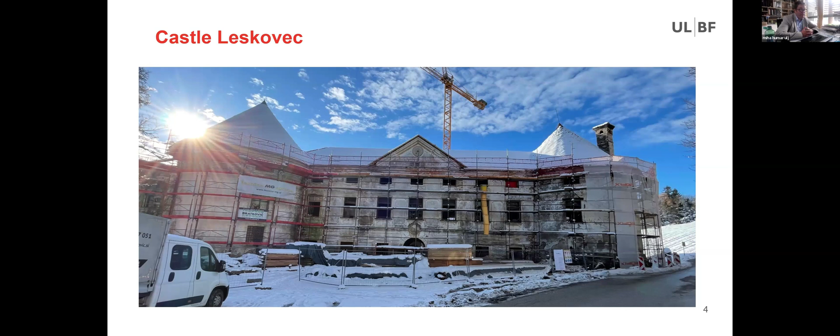This castle's renovation has been going on for a few years, and it's very likely the renovation will continue for additional years. The castle is in a rather bad shape right now, but the local community has a lot of plans to make it a location for cultural events, weddings, wine tasting facilities, maybe a boutique small hotel or things like that. But in order to do that, the castle needs to be maintained, because right now it's not suitable, not even for a prison.

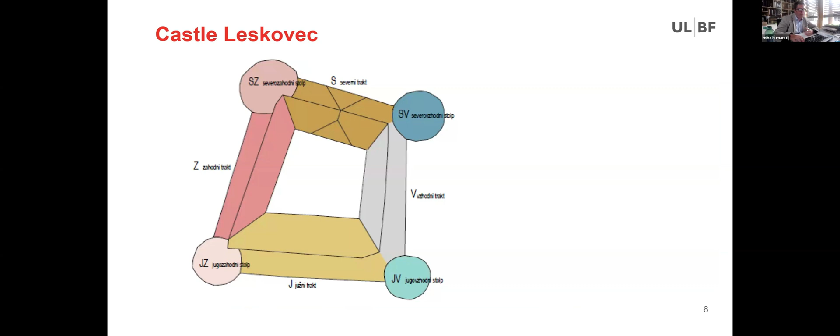That's how the castle looks from the top. It has 4 towers and a central yard, and this castle was first mentioned in the 15th century. The Slovenian polyhistor Valvasor made a drawing of this castle in the 17th century - that's how it looked at that time. We have to consider the images might not be very accurate, but the original idea is very similar to what we see today.

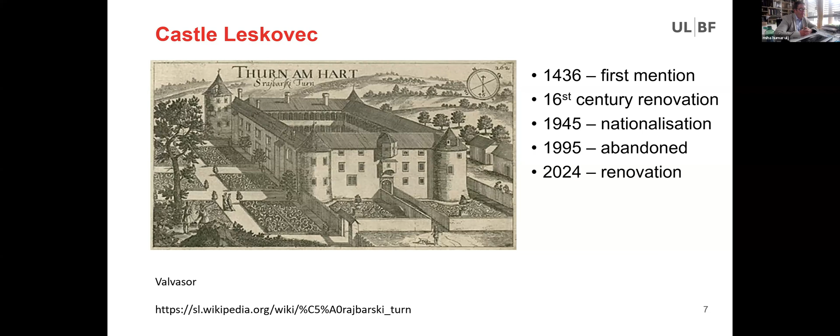In the 16th century it was renovated. In 1945 it was nationalized, and then it was abandoned after 1995 for almost 30 years. In those years, as long as this castle was abandoned, it suffered a lot.

The majority of the wood in this castle is in the roofing - that's how the roofing looks. The question that we got is: is this roofing construction in good state, or do we need to replace it? And if the material is degraded, how is it possible to reinforce it? Is it possible to use wood preservatives to stop decay? And how to proceed - they want to have kind of recipes.

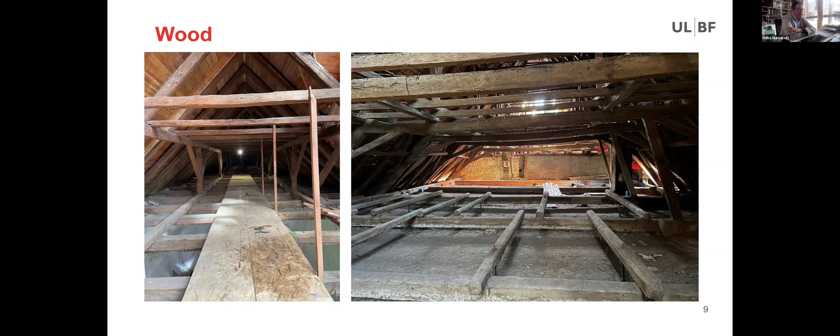And that's why we have been in this castle 7-8 times to assess every beam and recommend what to do in the future. That's how the construction looks - part of the material was already replaced, predominantly of the roofing material. The rest of it is just there, let's say that way.

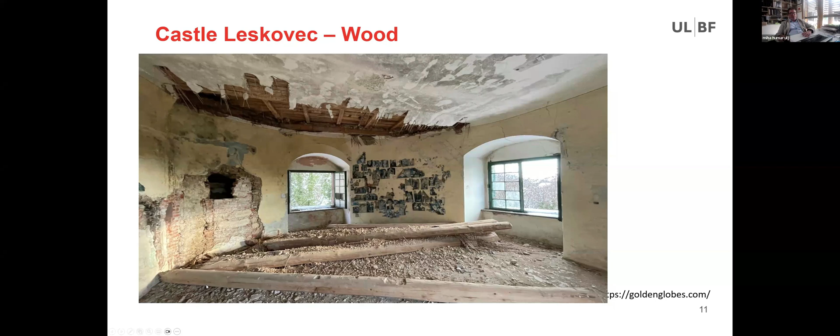Please continue. On part of the castle, we can see there was already damage. You can see the beams that were deteriorated from the roofing. So part of the castle was already rather dangerous to walk on at the moment, like this one. We can really see that part was already demolished.

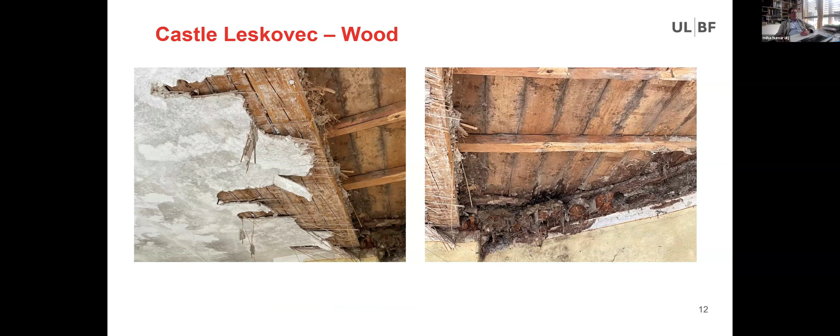We have to consider that the castle was empty for 30 years. There was zero maintenance during those 30 years, and there was a lot of leakage. There were a lot of problems noticed within this castle.

There were some examples of bad maintenance. For some of the beams, we were not sure why certain things happened. For example, the owners, at some point, decided to cut this beam at this point. I'll show you - you can see that they decided to cut the beam here.

They simply cut it with a saw, and the way the beam was loaded, it was under bending load pressure. There was a huge tension released, so the force goes in both directions, and a huge crack developed. This influenced the static performance of the castle.

of the whole floor. So there were a lot of examples like that where people - we don't know if they were looking for fuel wood, or wanted more space and wanted to remove part of the wood. We have no idea why this happened.

During our study, we had to recommend what to do with this kind of material. We recommended that they apply screws and fix those two beams together, apply adhesives in those cracks, and integrate this member, filling the cracks with adhesives - this will enable the beam to remain in service in the future.

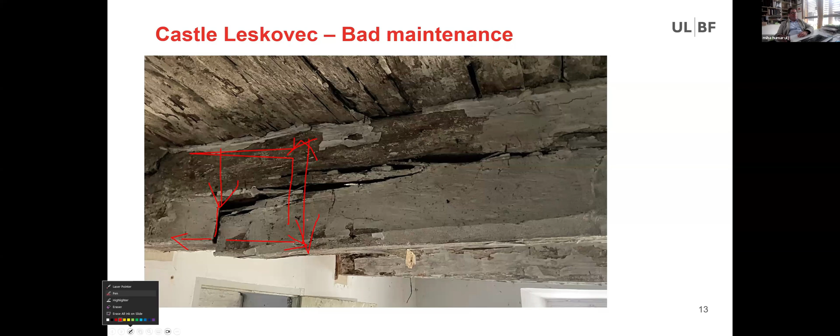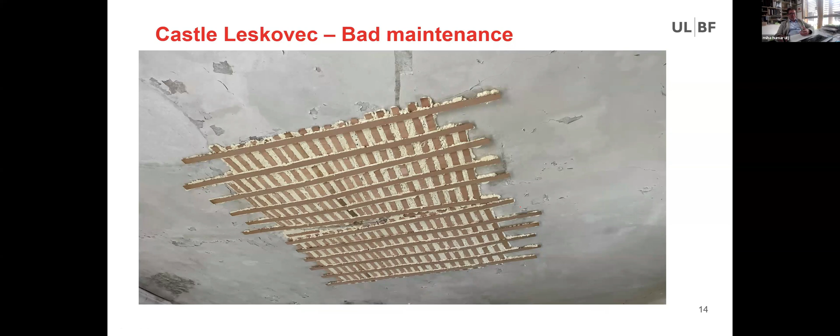For example, in another case, there was this kind of maintenance - they used polyurethane foam to fix the roofing in one of the buildings. There was probably some leaking, I don't know what happened on top, and they used this technology to repair it. There were a lot of repairs like this, and this kind of repair didn't contribute to the good performance of the castle.

So we came to this building to assess the condition. The decay of wood is primarily associated, in our climate conditions, with wood decay fungi. Wood decay fungi are the prime cause of the decay, and that was true in this castle as well.

In addition to that, insects are the second most important factor. But insects are less important in Slovenia than in some more tropical or warm countries.

When talking about wood decay fungi, we are aware there are four types that appear in buildings: brown rot, white rot, soft rot, and sapstain. Within this castle, we primarily noticed brown rot fungi - I'll show some examples. Brown rot fungi predominantly degrade cellulose, and what remains is the oxidized lignin.

In addition to that, there were some sapstain fungi. Sapstain fungi don't actually degrade the material, but live off the residues. We can find them also on the plaster and on the walls, and they're usually associated with condensating water. If sapstain fungi are present, we know there are leakage problems.

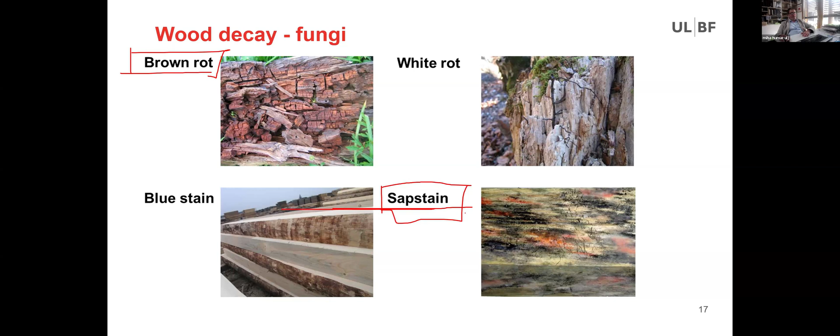And one moment, if I may.

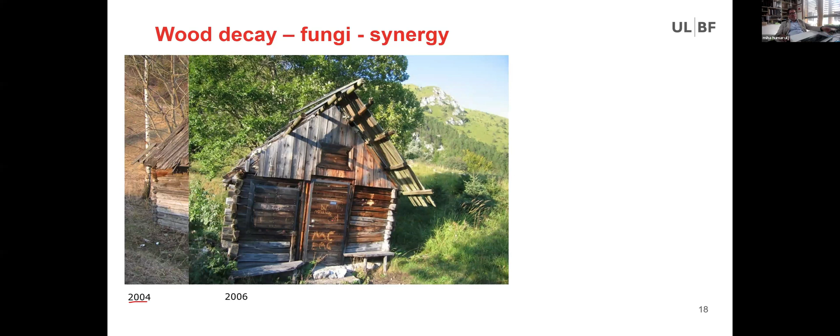Those photos, the first one was taken in 2004. At this time, this building was already almost abandoned, and there were some damages. But later on, we can see that year to year there was more damage until everything collapsed. In 10 years, from 2004 to 2015, the building completely collapsed.

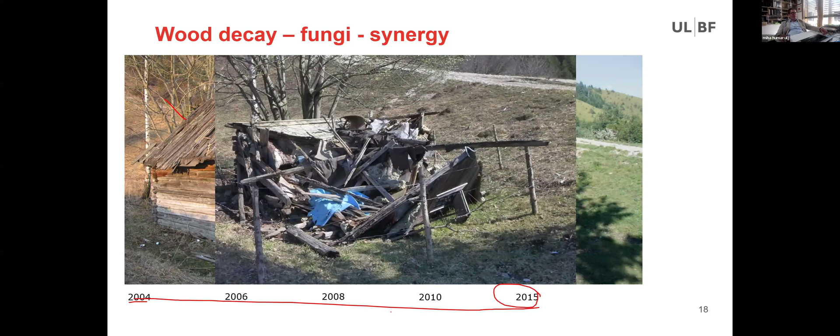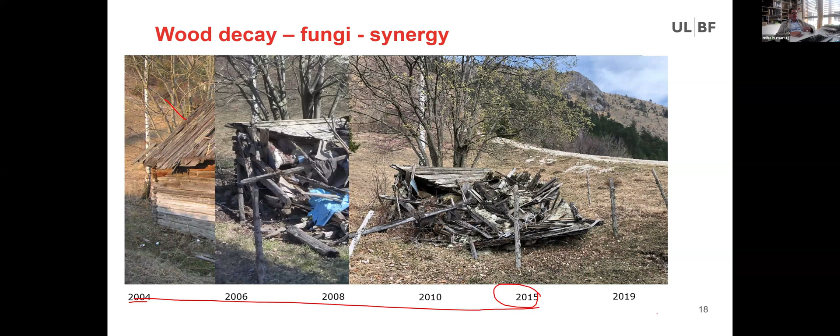If we're not maintaining the building, everything can move really, really fast. We have this building in this kind of condition for years, and we're always joking that those buildings are waiting for the 1st of May, because on the 1st of May we're always burning open bonfires, and we should burn this wood in the bonfire.

Whenever we are talking about wood decay fungi, we are aware that we cannot stop the decay - we can only slow it down. And if we want to slow it down, we have to keep wood outside the optimal degradation conditions. This means that the easiest way to do it is to control the wood moisture content, so wood has to be drier than this.

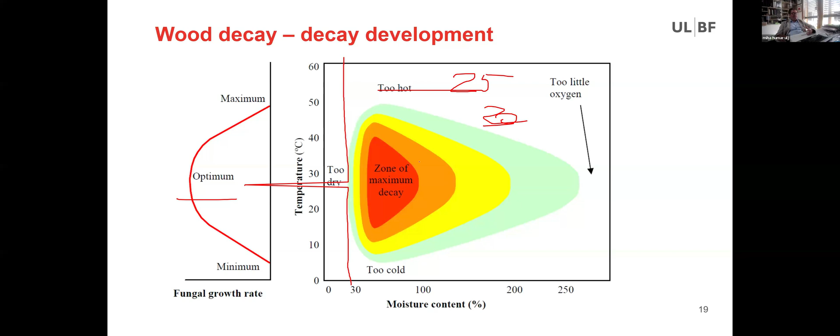This means wood has to be drier than 25%. Usually the maximum limit we state is 25, but we recommend a moisture content of 20%. 20% is the moisture content we ask for, because we cannot fully control the temperature - that's an outside condition - but we can control the moisture content. That's why we always ask all house owners to ensure with maintenance that moisture content never exceeds 20%. But things are a bit more complicated, because for some wood species, sometimes the moisture content limits are even lower.

The lowest moisture content reported is 14.6% - that's the minimal moisture content of wood where decay happens. This means it's very low. Usually the moisture content of wood in a building, let's say in a residential building, is around 13-14%, so this one is almost at that limit.

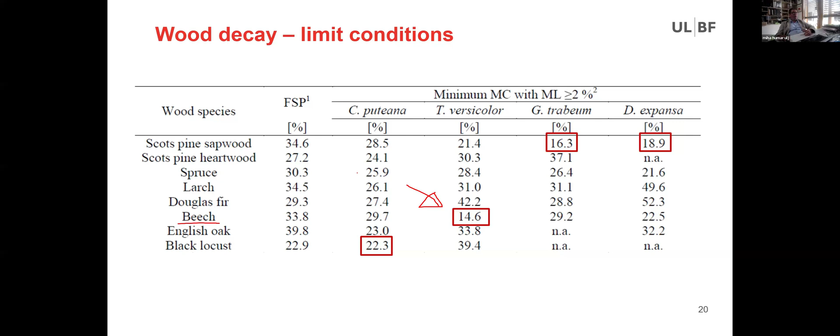But we have to be aware that this is true for beech, and there is always a water source nearby - like soil or some wet pockets. But in general, we talk about 20%.

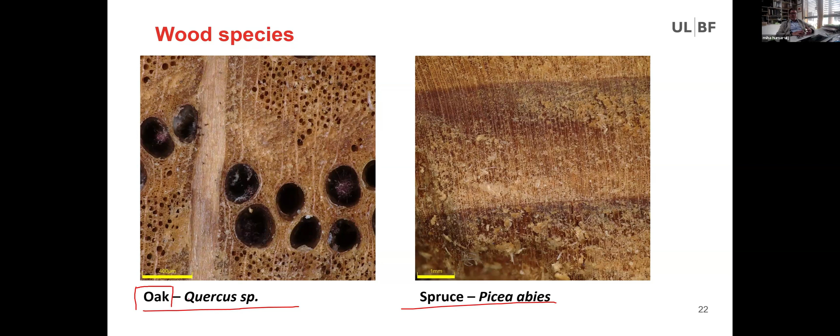When we're talking about oak, especially in Slovenia, I have to mention that up to the 1850s there was a law that oak was allowed to be used only for noble families, church, and military purposes. So oak in this area, at the time the castle was built, was very expensive material. If they used oak for this kind of construction, this indicates that the owners of these castles at that time were rather important.

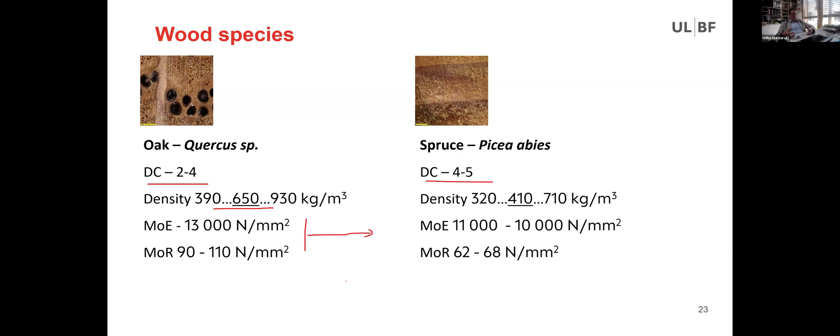The basic properties of the material are indicated here. Oak is very durable material, spruce is less durable. The density of oak is higher, and the mechanical properties of oak are better compared to spruce. That's why it's obvious that because there was a lot of oak wood used in this castle, even if there was bad maintenance, the castle can still resist well because they used high quality material in the past.

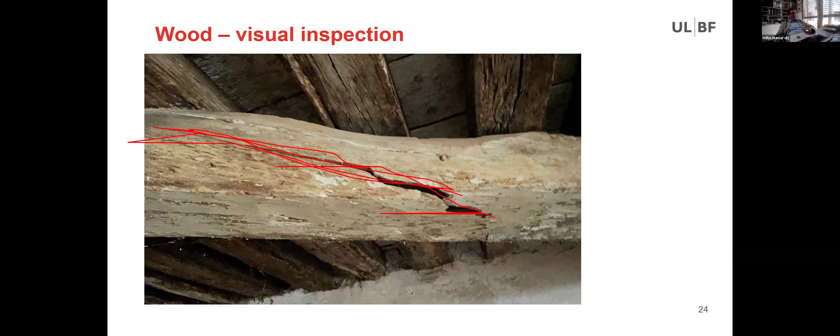But it was not only one mistake. We noticed quite many of them on several occasions - a second, same type of crack formed. This crack is not a result of a huge load or a lot of snow or anything like that, but it indicates that they did not pay sufficient attention to selecting high quality material in terms of growth condition. We noticed, I think, 8 or 10 beams like that on the castle. That's far above average - it would not be acceptable in today's construction to have this kind of material.

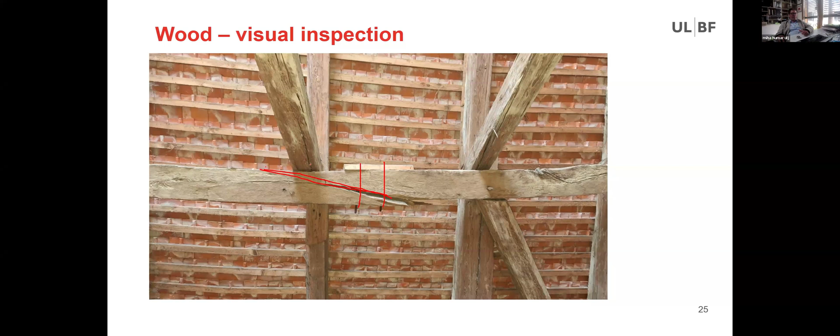You can see that in the past they tried to already solve this problem. You can see those screws oriented here, where they tried to fix this error in the past already - that's an old repair. We don't know exactly when they tried to do it, but it's obvious that they tried to solve this problem.

In addition to that, we noticed some insect damages. But before I move to the insects, I would like to show you those white stains everywhere on this beam. Sometimes people think those white stains indicate the presence of wood decay fungi. But if you touch this material with your finger and try to squeeze it between your fingers, you will notice that this is very, very fine salt.

These white powders are white crystals that are deposits, a clear indication that there was water leakage present here in the past. The water evaporates, but the minerals that were dissolved in this water remained on the surface, and those minerals usually originate from the roofing material. So if you see this kind of damage and you don't see the hyphae, that's an indication there was a huge water leakage in the past.

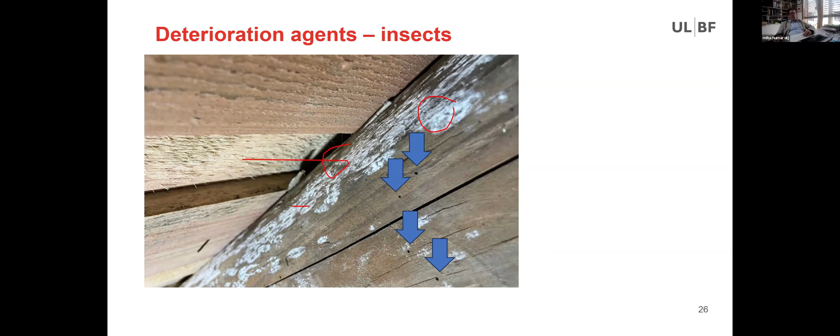The other things I want to point out are those borer holes. Those borer holes belong to the deathwatch beetle. We notice the deathwatch beetle in spruce and oak wood. This deathwatch beetle is characteristic of old wood, and that's how it looks like.

It's called a deathwatch beetle because the male representatives of these insects hit their head on the wood, and we can hear that. In the past, because people were superstitious, they heard the deathwatch ticking and thought death was coming, and there was a lot of superstition about that. But it was not a death call, it was actually a love call, a mating call. The male was trying to invite the females to join them, something completely opposite to death.

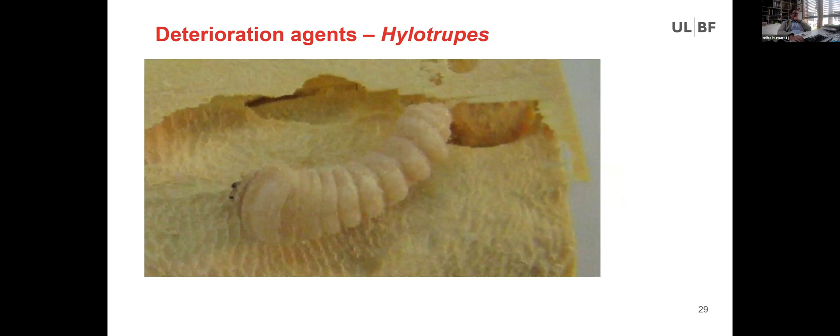In addition to that, we also see damage from longhorn beetles. That's very common for spruce. For a house longhorn beetle, it's characteristic that a female can produce a lot of eggs, up to let's say 300 eggs. The damage caused by those insects can be seen like that.

Usually the surface of the beam is not deteriorated, but the sapwood below this surface could be completely degraded. It's like just sawdust, but luckily those insects are attacking only the outer layer of the beam, so they're not reducing the mechanical properties of the material too much.

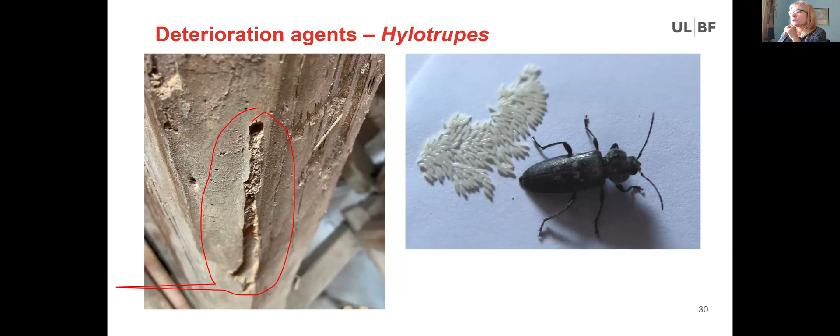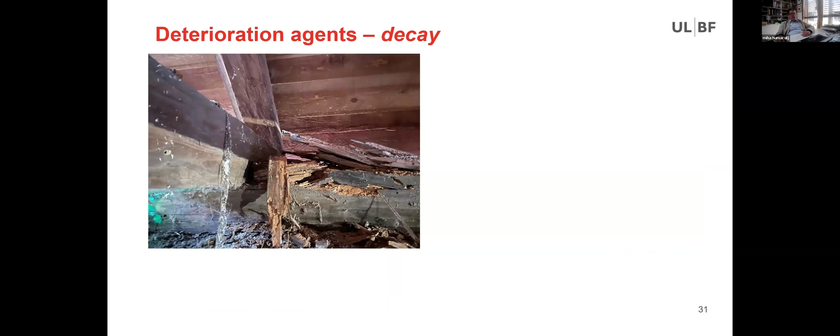In addition to that, we see a lot of decay. The decay was brown rot decay. Decay caused by fungi was the prevalent factor of all kinds of damage within this building. In this image, I'll show you the most basic characteristic of the fungi that we see. This is the Coniophora.

In English it's called the mining fungus. The mining fungus indicates that this fungi was found in mines, where the material was very humid, where there was a lot of condensating water. So this indicates that there was a lot of water present in this castle as well.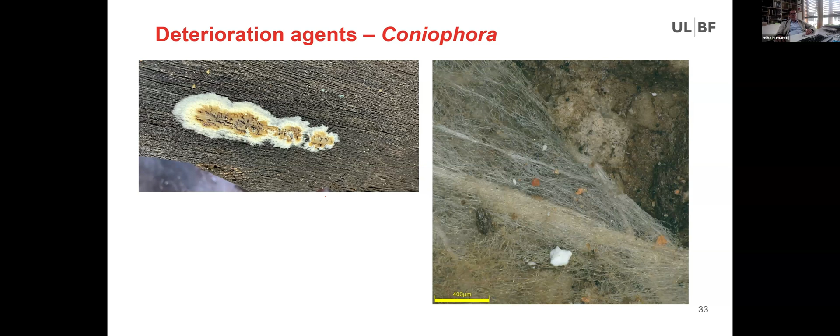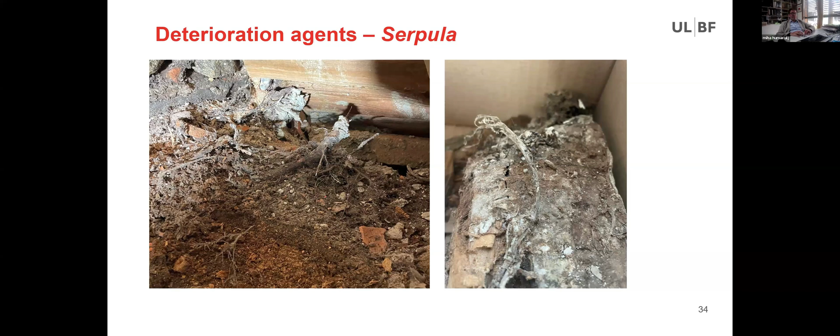That's what I know. The second one, the most annoying fungi in this castle was the fungus called Serpula lacrimans. This fungus is able to grow also through concrete or brick walls, so it can even cause damage on brick material, not only on wood. The problem with this fungi is that it's able to produce water during the decay of wood, so once it infests the material, it can be self-perpetuated, degrading wood on its own. We noticed a lot of damage caused by this fungus.

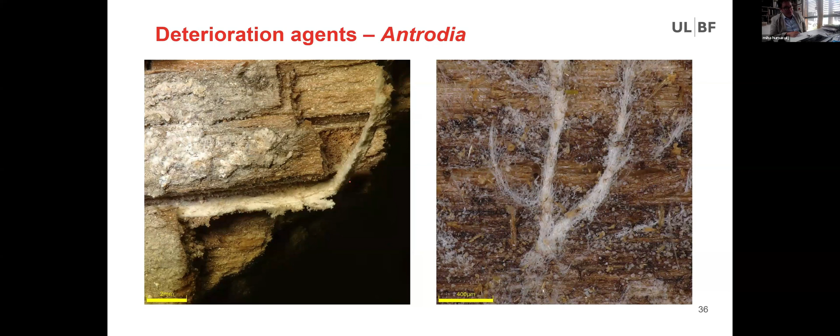And the third fungus was Antrodia fungus. That was another one that was also present. It was a clear indication that because the castle was so big and moisture conditions were so diverse, different fungi were finding their optimal ecological niche to grow within this castle.

In addition to that, we noticed on all the walls in this building, a lot of walls were covered with mold fungi, with staining fungi that do not degrade the material, but degrade only the surface of the material.

And the question is why and how those fungi affect the integrity of wood. So I have to mention.

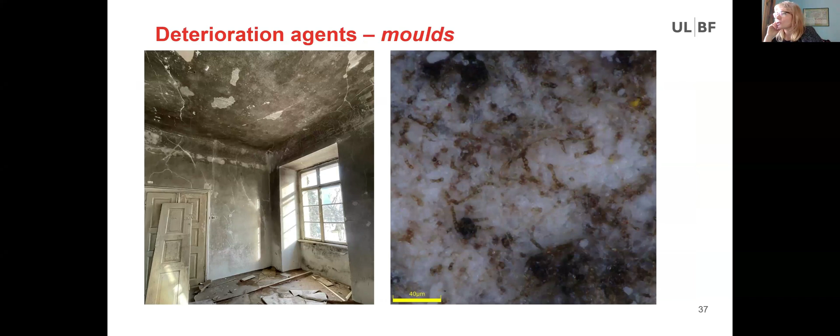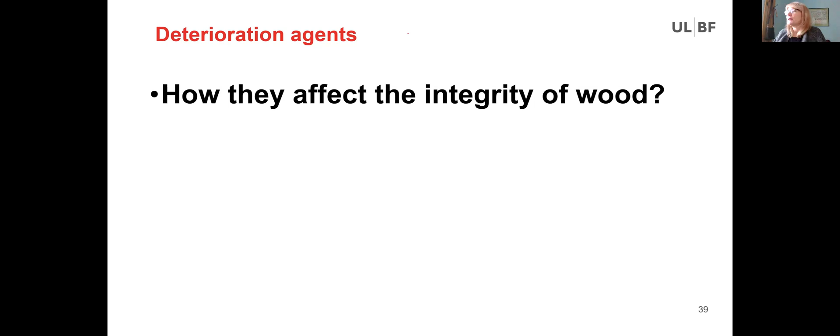So the fourth thing that we do then is to measure the moisture content of wood. We are using two different moisture content measurements. One is based on electrical resistance, and the other one is based on electrical capacity. This one is faster, this one is more accurate.

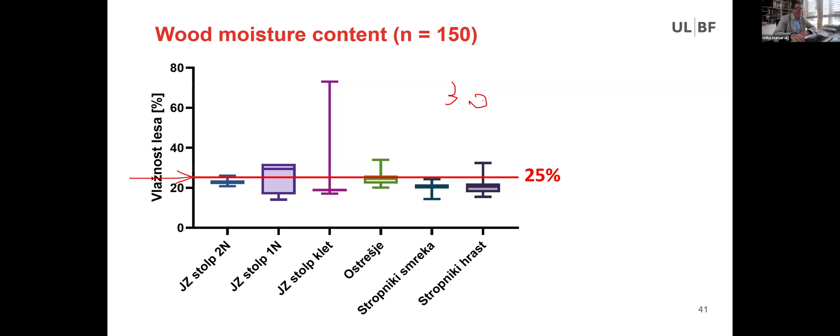Thank you. Some of the words in Ukrainian, like zamak, are very close to Serbian as well. I mean, it's... Yes, you are right. Because I know what you're talking about, for me it's very interesting to hear. It's dangerous if you understand what I'm talking about.

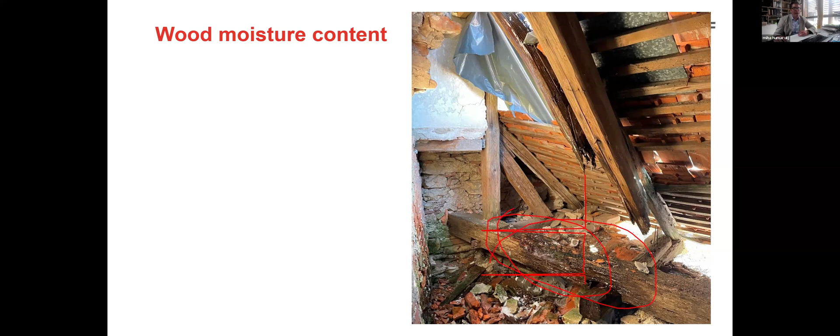Okay, thank you. I mean, the reasons for high moisture content can be seen here. For example, you can see water dripping here, the roof was leaking. They repaired the building, but there were still a lot of mistakes on the castle. You can see that this part is completely wet. That's not okay, and it's obvious it's not okay.

The second type of measurement that we run on this material is we try to assess the density of the wood. It's very easy to assess the density of wood in the laboratory, but to assess the density of the wood of the beam, it's very challenging.

But there is a method called the screw withdrawal device. So we are running the screw into the wood, that's a screw over here, and then we try to pull it out. And the force needed to pull out the screw correlates well with the density.

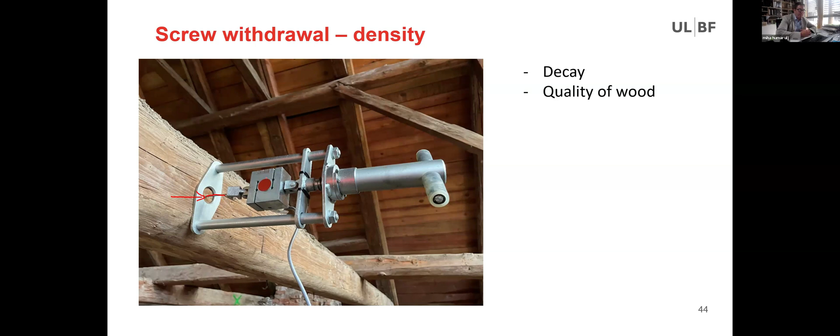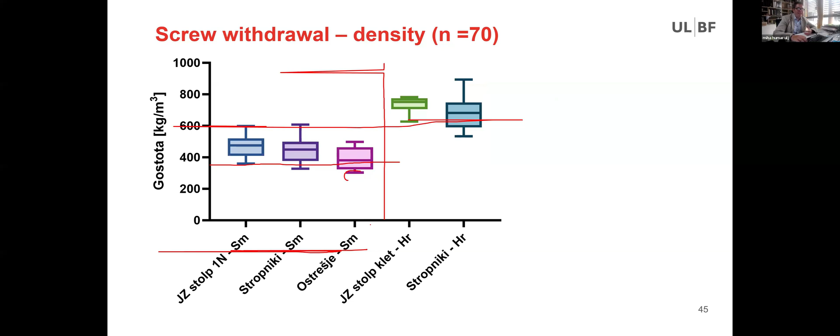And those are the results of the density, the results of those samples. That's spruce, and that's oak. But we can see that the material below this curve is degraded material. The oak, however, was rather well preserved, and the majority of the oak was above the average curve. So the density indicated the material was rather well preserved.

In addition to that, we're also running the time of flight measurement. So we are measuring the time that it's needed for the sound to pass between those two electrodes. And if we're measuring this time, and if we know the density, we can calculate the modulus of elasticity based on these data.

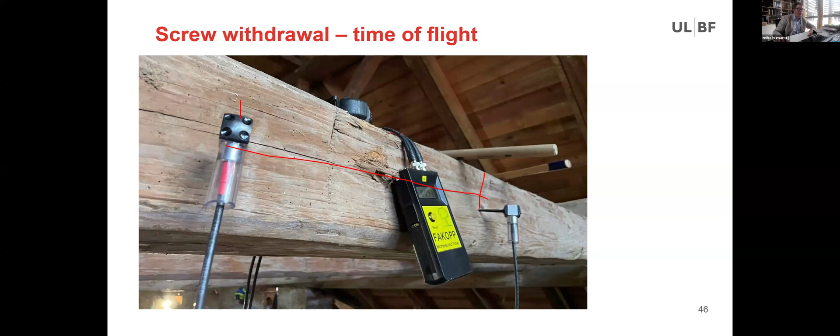We have to be aware that this information is about the modulus of elasticity of the surface, not of the central part. But still, we at least have the impression of what the basic modulus of elasticity is. This is the lower 80% of the modulus of elasticity for spruce, that's the red curve. So we can see that quite many beams were very, very degraded because of decay or fungal infestation.

And they need to be reinforced.

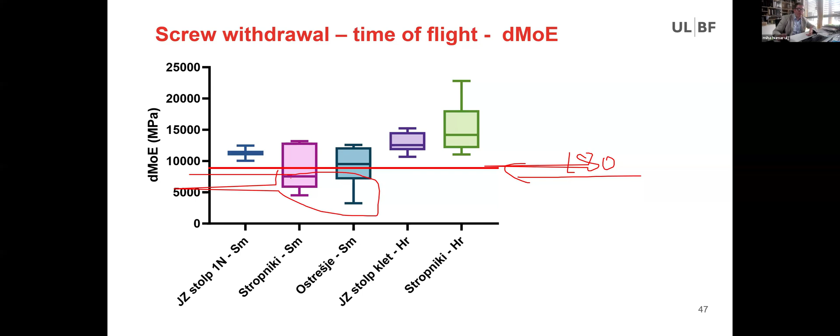And the second most important device that we are using is for resistance measurements.

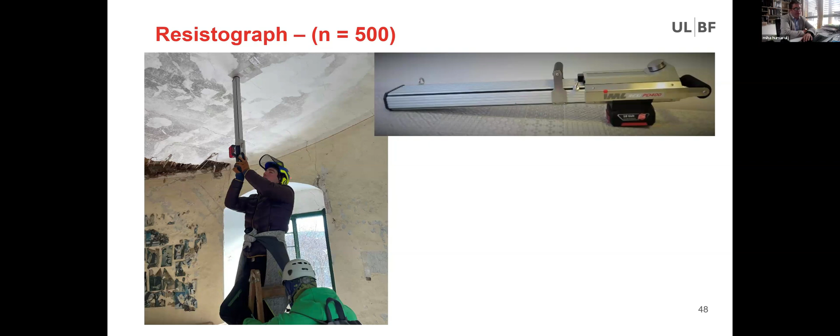So using this device, we are measuring the resistance, the momentum of the needle penetrating the wood.

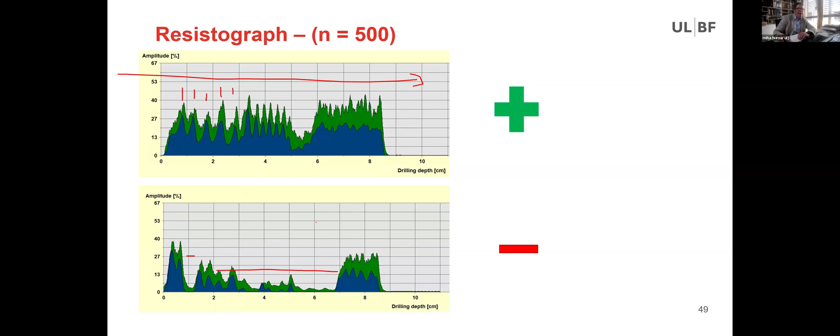So the needle is penetrating this direction. These are the growth rings. We can see the difference between the late wood and early wood. And we can still see that in this case, this part is degraded, so we can see what happened with the cross-section of the wood. We have analyzed 500 beams on these castles.

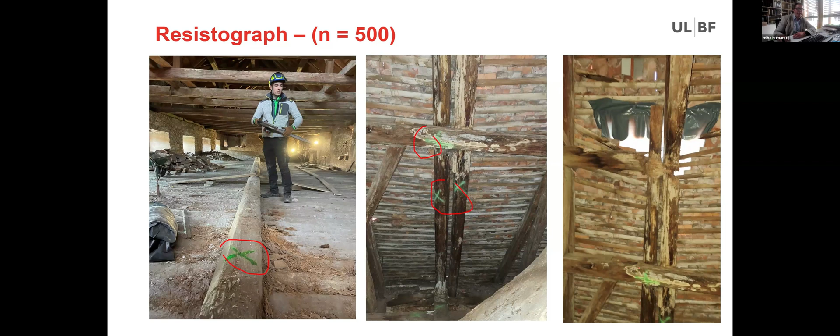Because we want to indicate immediately that something is wrong, we mark those beams that need to be replaced right away, to help the owners know where they need to replace it. Like this - this part is completely degraded.

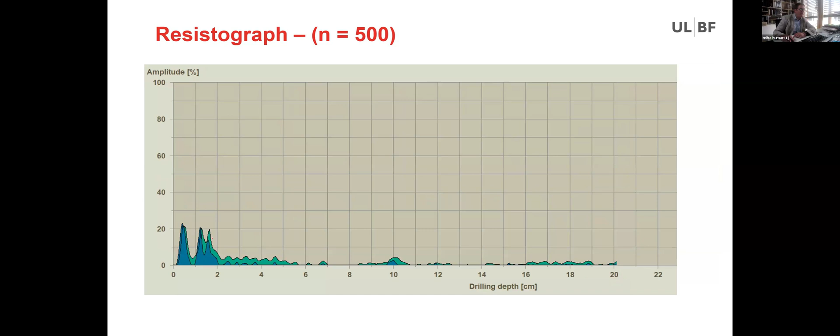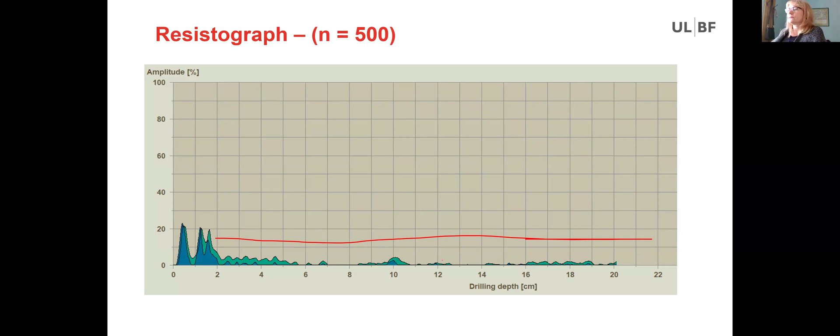So we calculated the degraded cross-section. As I mentioned, we measured 500 beams. On average, 14% of the whole cross-section was degraded, the median value was 4. So 90 beams had more than 20% degraded cross-section, 72 more than 30%, and 39 more than 50%.

We decided that those have to be replaced, and this can be reinforced.

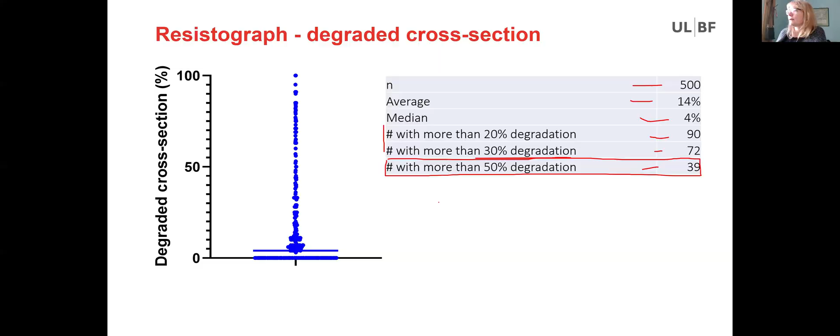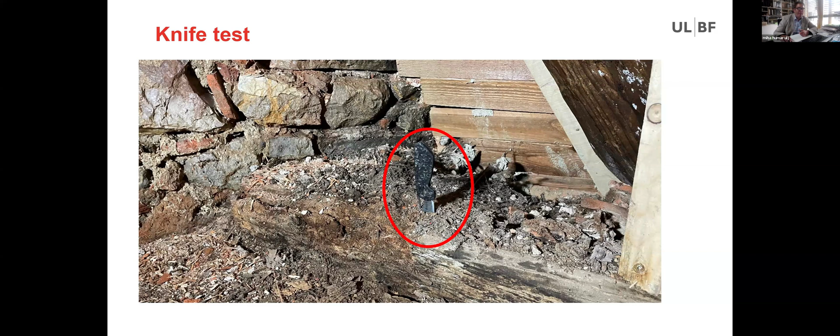One of the basic tools we are using is very simple - it's a knife, I always have it with me. That's the basic tool that we're using. I'm using the same knife. My colleagues joke that I should use the one with the red handle, because then you can see it better in the photos. But you can easily see the degraded part with a knife. Sometimes the knife is enough.

Or like in this one - you can see a very degraded part.

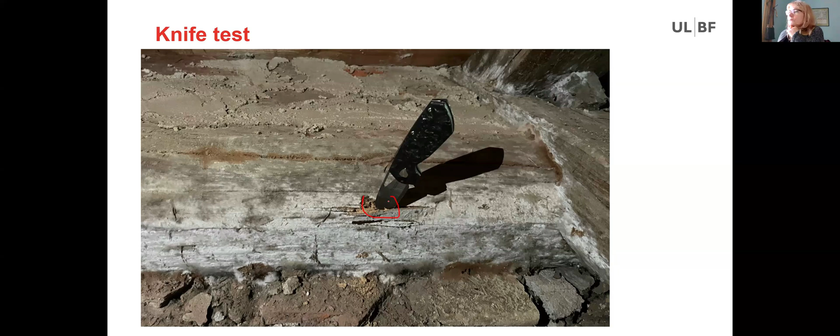Okay, and what were the recommendations? Some of those recommendations are very obvious - the building needs to be dry.

Wood needs to be dry. They have to work seriously and dry the material. Fully degraded material has to be replaced. All new material inserted into the building has to be impregnated with copper-based preservatives.

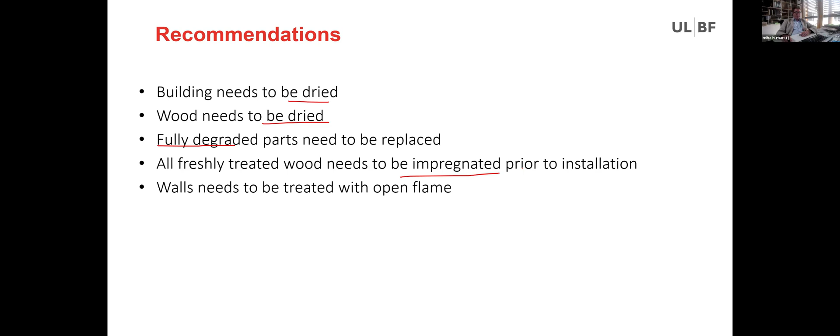And all walls where there was any indication of fungal mycelium have to be treated with open flame.

If they spend millions on the renovation of this castle, they can easily afford this kind of sensor to monitor the building.

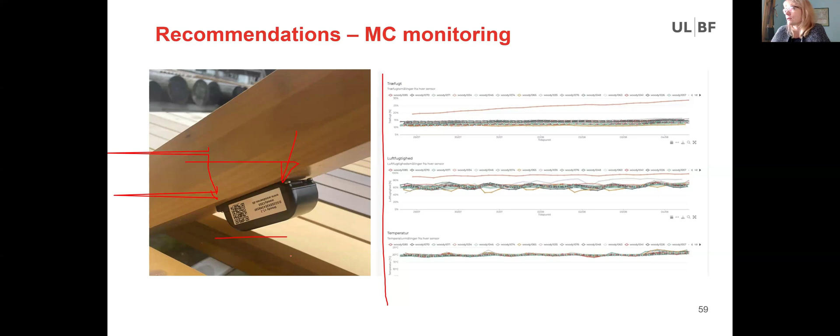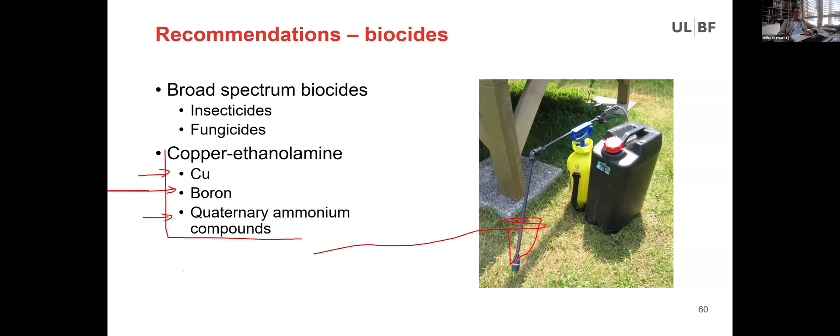In addition to that, because some parts were really, really degraded, in this case we recommend them to use those fungicides. It's called Dazomet. This is the preservative that is approved, it's a legal chemical, and they use it very frequently in Germany, predominantly for treatment of the poles.

If there's incipient decay present in the pole, you put it like that. It's a dusty material into the wood, and in wood this material is slowly decomposing, and when it's decomposing, it's reacting with wood and stopping the growth of the fungi.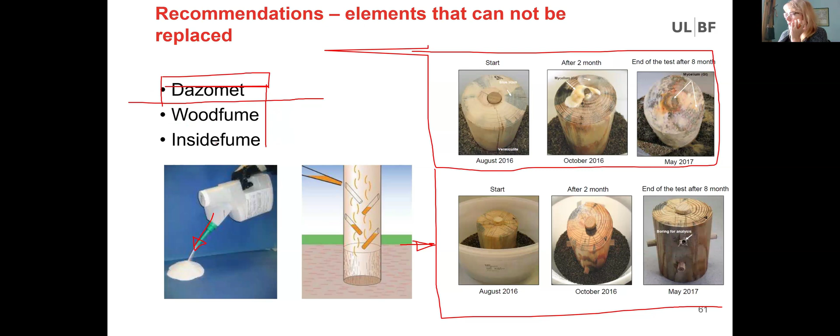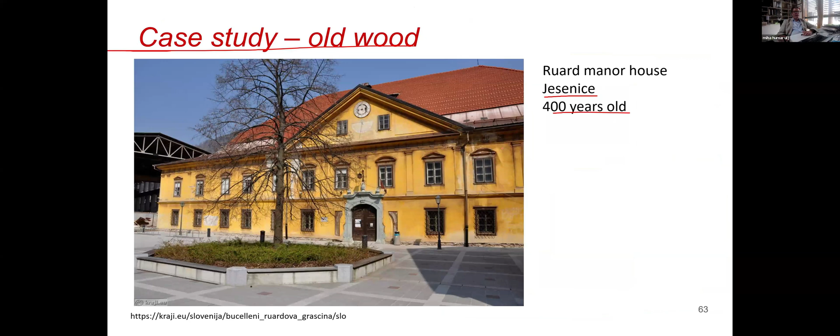In addition to that, we are interested in what are the mechanical properties of the old wood. In this case we run another experiment. That's a different one, in Jesenice, but I just want to show you this, because we did this experiment on this building. It's also 400 years old material, and it was also degraded by the fungi, but we were able to isolate some of the wood material for analysis.

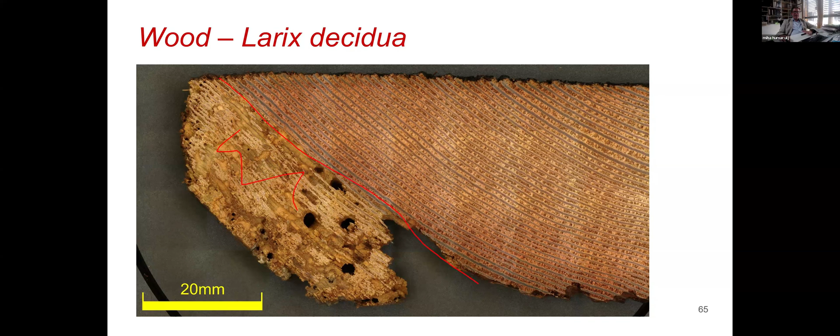That was a larch wood, Larix decidua material. You can see it's the sapwood, that's the border between the sapwood and the heartwood. This one is degraded, but the heartwood remains rather okay after 400 years. And that's how it looks like under the microscope.

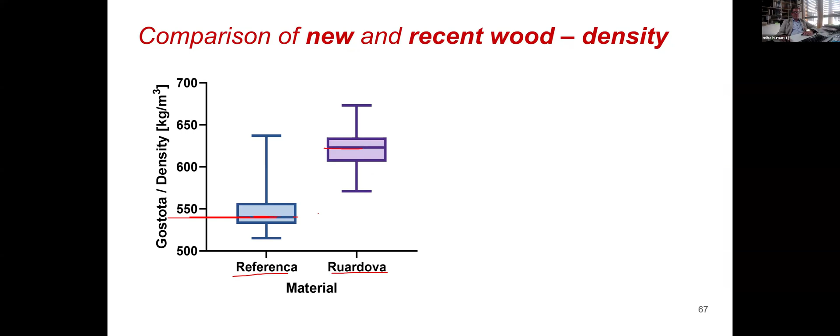When we compare the old material with new material that we get from the forest, the old material has much, much higher density than the new wood because probably the growth conditions were better at that time. It has better static mechanical properties like flexural strength, and it has better bending strength.

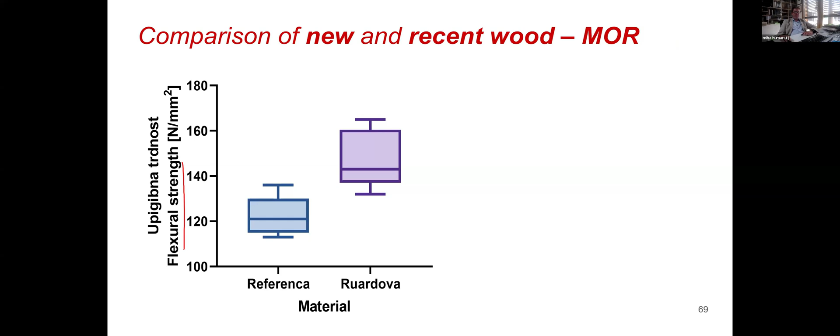But we were also interested in what are the dynamic properties of this material. For this purpose, we applied these fatigue tests on this material. So we expose wood specimens to cyclic loadings, and we counted the number of cycles that this material survives before it breaks.

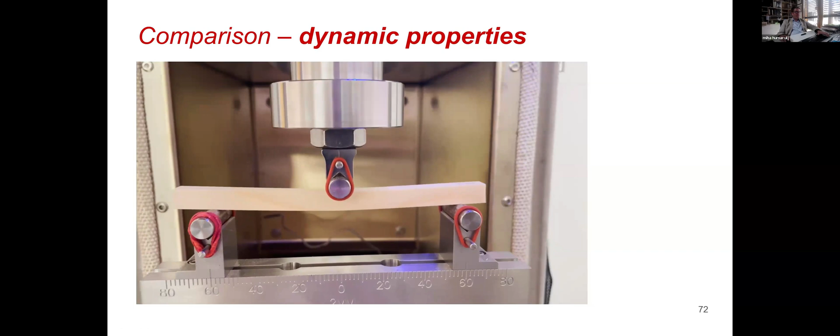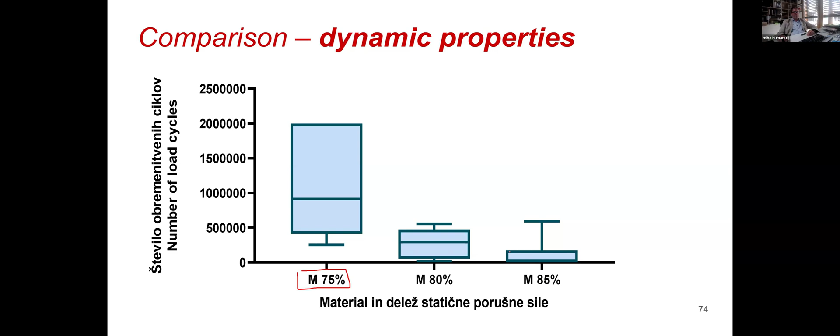And those are the results. That's the number of loading cycles required before the material collapses. So if the material was exposed to 75% of the maximum loading, maximum bending strength, it can survive 1 million cycles. If it is exposed to 80%, it survived 400,000. If it's exposed to 85%, let's say 100,000. That's for the fresh material, the new material, you can see the data.

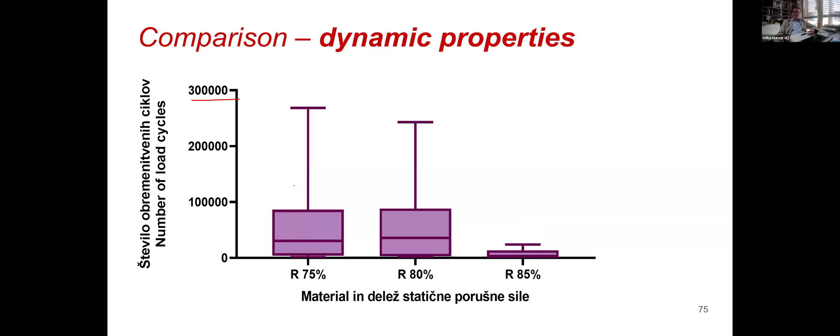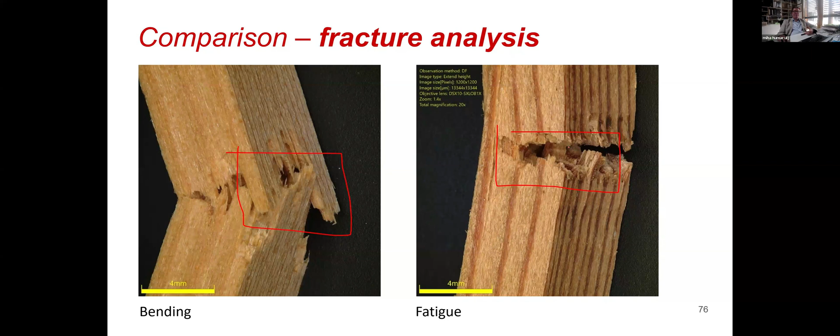Even if we look at the type of the cracks, you can see that's a type of crack of the old material, and that's the type of crack for the fresh material. We can see that this one has shorter fibers, so the fatigue is different. It was the same insect that also caused the damage in this kind of construction, and if there were boreholes present, the material was very, very sensitive to the fatigue. It cannot survive any kind of fatigue force.

So what we want to know is that if we have old wood, we have to be more careful when we're exposing the old wood, let's say, to cyclic loads, like dance floors. Dance floors are a typical cyclic load. But if it's only static load, it's not a problem.

And this brings me to the end. I would like to thank all our financiers that helped me run this research, and thank you for having me here. I'm really happy to answer all of your questions.

Thank you very much, Professor Humar, for this very interesting aspect of cultural heritage protection. I understand now that we should think about not only an integration course on cultural heritage in war, damage and conflict, but also chemistry for cultural heritage, because this point of view is really interesting. So thank you so much for delivering this interesting lecture.

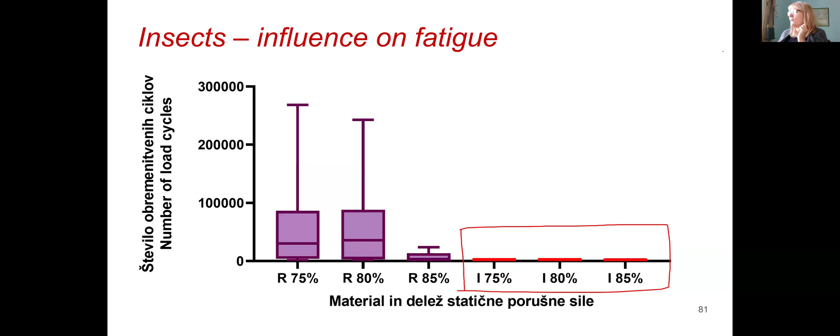I don't have a question, however, I would like to say thank you for this. When I first read the name of this lecture, I was a little bit - I'm not shocked, but what is it, how can it be connected with the topic of cultural heritage management? But now, after these lectures, I understood that it's maybe not too close, but for our students, generally for staff of cultural heritage management, it's important - a simple case to understand how it can be used. For example, when we are preparing applications connecting with management of castles, or other cases, we should know how it can be used and what we should do. Of course not us, but probably another specialist, but we need to know how it should be organized. So it's important in such case. Thank you, and welcome.

I have a question also, Professor Humar, concerning your specialty for your students - what specialists are they? I mean, from the Department of Wood Science, Wood Modification, Protection, and the Faculty of Biotechnology, what specialization do these students have?